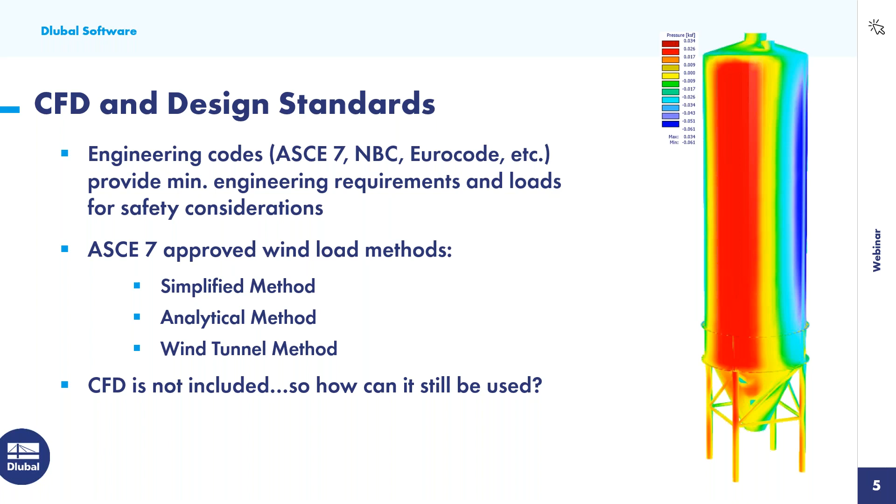On this next slide, I want to lay out a few benefits and advantages we can find when carrying out a CFD analysis. Essentially, a program like RWIND is a very cost-effective engineering tool for many useful applications. I put a lot of emphasis on the word 'tool' here, because we're by no means suggesting that this program should take the place of the requirements within the standard. So how can we use this in addition to the standard? We know that codes such as the ASCE 7 and NBC only provide minimum wind loads.

It could be in certain scenarios that we need to increase these loads due to special cases, primarily for complex structural shapes. We can also use CFD for structures that fall completely outside the standard with no minimum guidelines to follow. The code is very clear on many types of structures, but outside these provisions, we're making a lot of guesses and assumptions. So we can use CFD to ensure those guesses and assumptions are correct.

We can assess the varying wind loads very early on in the design process. We can simply take our structure, put it in this numerical wind tunnel, and adjust that design again very early on based on these applied wind loads.

A program like RWIND can also consider the surrounding terrain and object consideration. So if we have very complex hills or adjacent buildings, which is what we'll take a look at today, these are all going to affect the wind flow. There are certain coefficients within the standard, but these are all generalized, so if we wanted a more in-depth study of that wind analysis, we could do so.

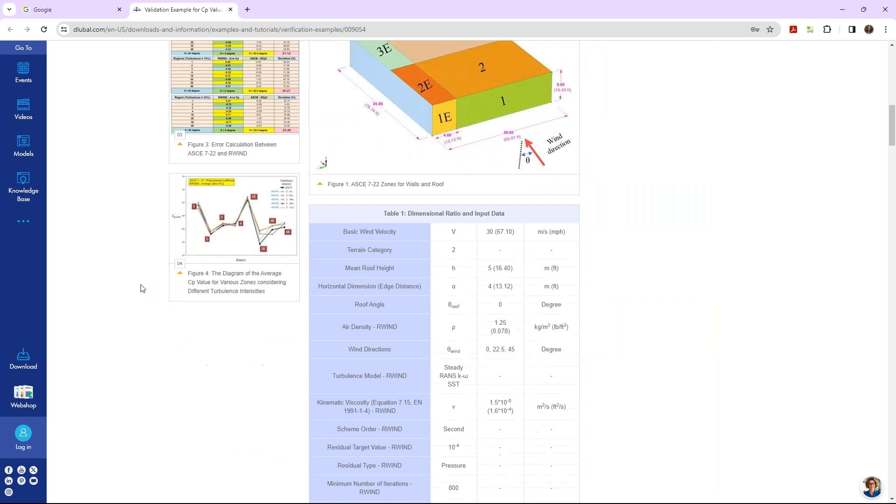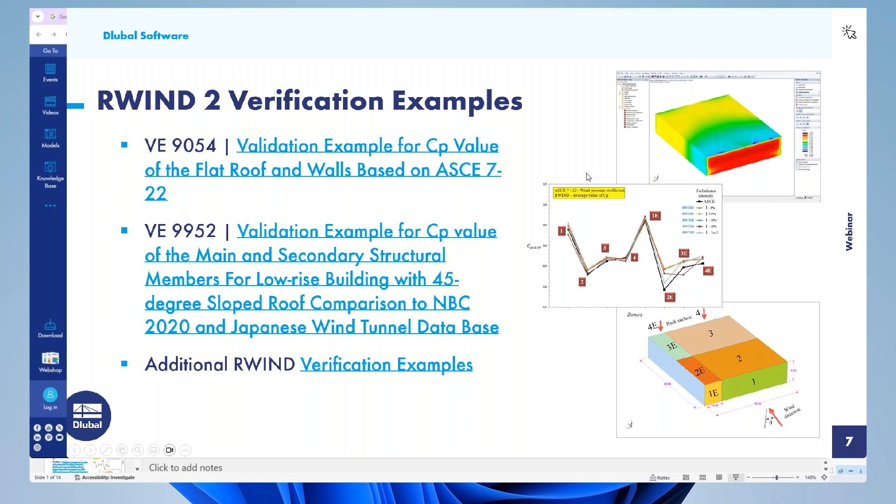The first, if we go ahead and click on it to take a look, is going to compare the ASCE 7 2022 standard with RWIND for a general box type structure. So we thought it might be interesting to compare these two to see how the RWIND results match up to the code standard. You can see the output and the deviation within this table as well as within this graphical format.

In a similar manner, we also have a verification example here with the NBC 2020. Taking a look at this particular verification example on our website, what you will notice is that this is for a dual pitch roof. We're also, of course, going to compare the analytical calculations from the NBC to RWIND, but also this one was carried out in a true wind tunnel test in Japan.

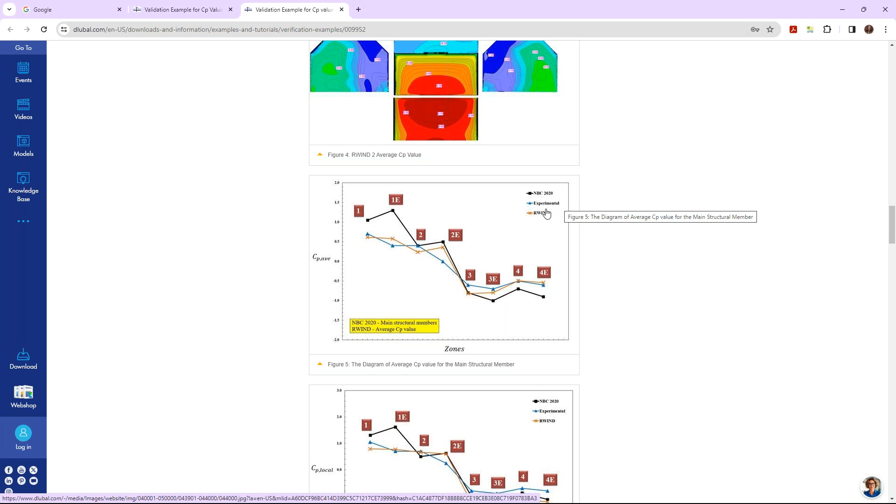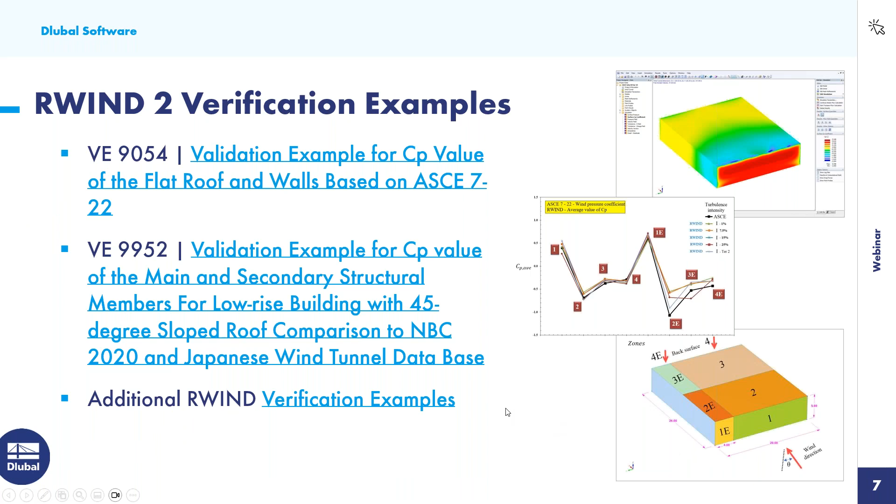So with this verification example, if we scroll down here, we will see those three methods compared in graphical format: the NBC 2020, the experimental wind tunnel, and RWIND. Now we have many more verification examples available on our website, comparing to Eurocode as well as other analytical calculations that you can access with this third link.

Now we'll take a look at several of the new features that we have released within RWIND 2 in the past several versions. I'll preface that each of these features will actually be looking at in our example today. So we'll begin with the wind tunnel size.

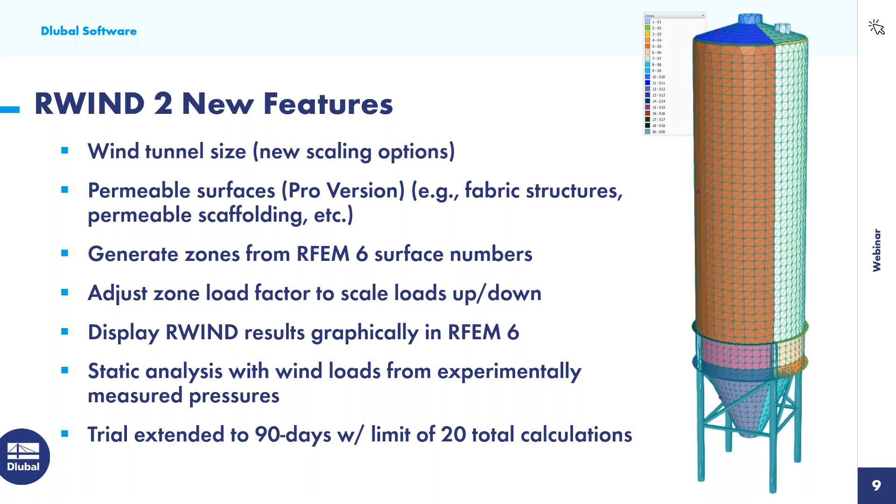And finally, the RWIND trial has now been extended to 90 days. This lines up well with our RFEM trial version that is also 90 days. Both programs will be full capability over this duration. It should be known, though, that with RWIND, we have a limit of 20 calculations. So if you are exceeding that or getting close to that, you might consider buying the full license at that point.

Okay, so let us begin in our FEA program, RFEM here. We can use RWIND as a standalone program, so I do want to make note of that, but for today's presentation we will be integrating the structure into RWIND and then integrating those wind loads back into RFEM.

For those of you who have joined us for webinars before, this structure may look familiar. I did a previous webinar on the silo structure design where I fully modeled this structure, carried out the analysis and design of the members according to AISC, as well as a general stress design for our surfaces. We won't get into that portion today. We're only going to focus on the wind analysis, but you can certainly take a look at that webinar if you are interested.

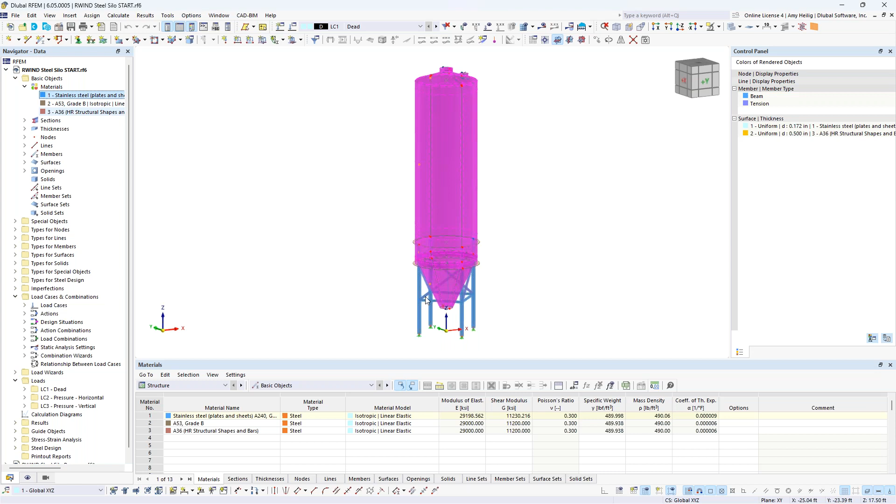So let's take a look at a quick model review. Going to our navigator here, we have our silo structure, and you can see these surfaces are defined with stainless steel. We also have A53 grade B pipe members supporting the structure at the bottom, and then we have a couple of ring beams, A36 material, as well as these channel sections spanning in between the ring beams.

Now, in the previous webinar as well, I had also applied various loads. So we have 3 simple load cases for today. The dead load is only going to include the self weight, so no additional loads applied here. However, if we take a look at the pressure in the horizontal direction, we want to account for some type of fill load inside of this silo structure. You can see that outward pressure along the body of the silo up here close to the top, but not quite to it. And then as well as in the hopper, we also have a friction load here for, again, that fill. So it's going to be in the downward direction along the full height of the hopper as well as the full height of the silo.

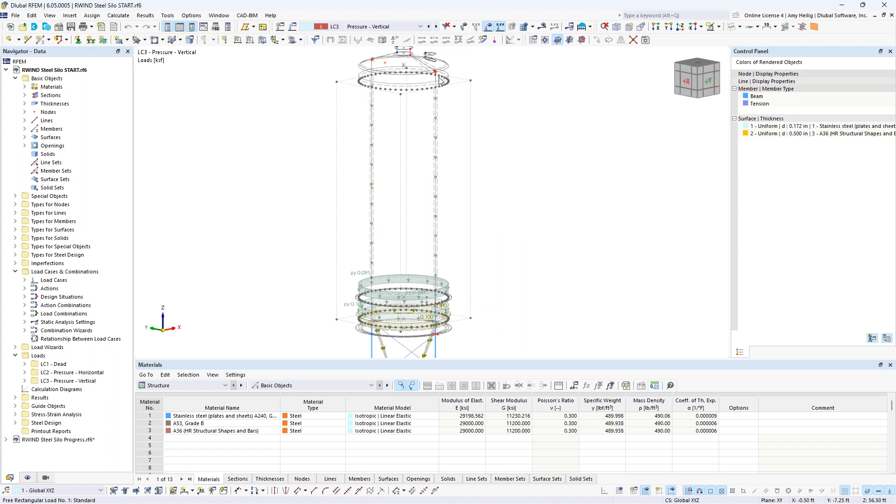So now we want to begin with our wind load. When we go to the base data, which we could right click on the model name to access, or access within our quick tools, this would be the dialog box that pops up when we first create our model.

We can revisit it here under the second tab to take a look at all of the various add-ons available. For those not familiar with RFEM, we work with this add-on concept in the sense that RFEM is the base FEA program that provides the modeling, BIM integration, and the full analysis. But if we want to carry out steel design according to ASCE or concrete design, or advanced analysis like dynamics or stability, we need these add-ons. So you create the package that's specific for your design needs.

You'll notice here that we also have WIND simulation. So this is telling the program that we now want to integrate this model with the standalone program RWIND.

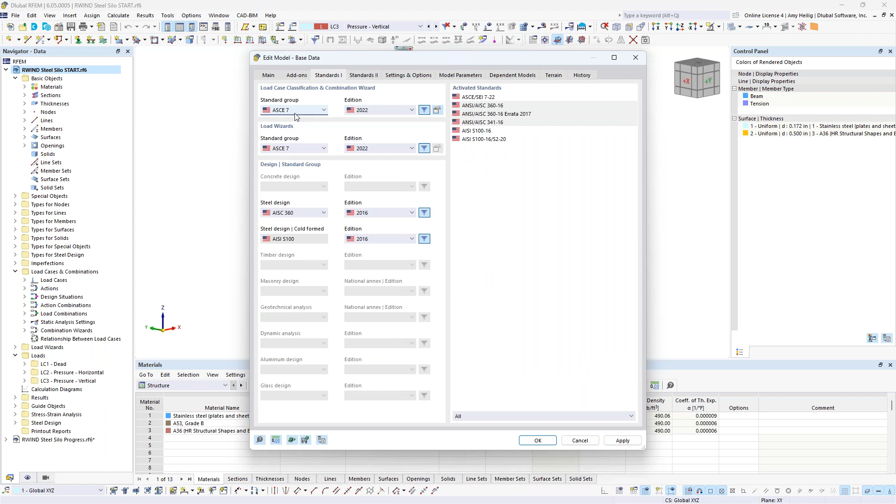Under the third tab, we will generate our load combinations automatically according to the ASCE 7, the 2022 standard, but more importantly, specific to our wind. We will generate our wind load profile according to the ASCE 7 2022 standard, which is available. We also have the NBC 2020 standard available, as well as many other international codes.

Now if we want to carry out the steel design, again we won't be getting into that today, but the AISC 360 is available, or the CSA standard. 2016 is currently released in this version, but we do plan to release the 2022 in the next few weeks.

Once we have this information input, we want to go into our load cases and combinations, and we will generate our first wind load case here, load case number 4. We'll give this the name wind, with the action category set to wind load based on the ASCE 7.

Now I could manually apply my wind loads here to the structure, and in that case I would keep the analysis type set as static, but because we have enabled our wind, we now have the wind simulation option available. This gives us two additional tabs here up at the top.

Moving to the second tab, we want to input the wind simulation analysis settings. This is what is going to be used in RWIND, but we have the ability to set this here within RFEM. We have a default definition set that we can simply modify, or we can create multiple definition types with the option down here in the lower left.

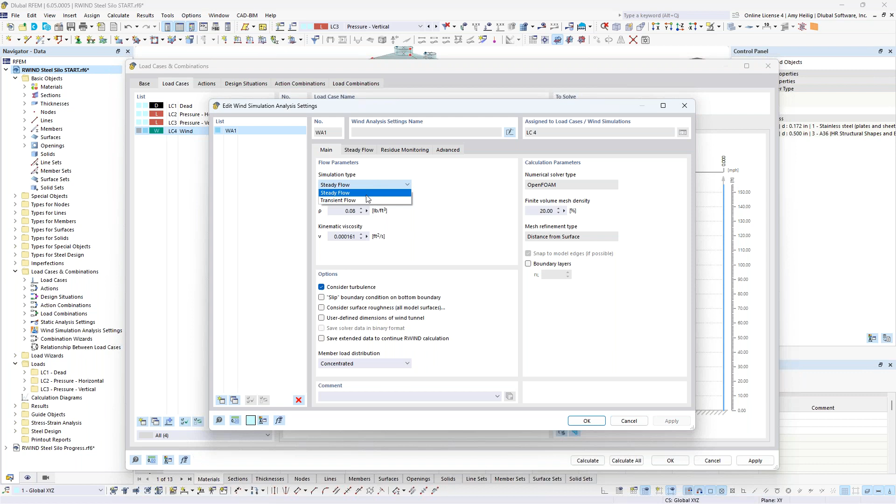The simulation type is going to be set to steady flow. Again, we covered this in the PowerPoint, that if you do have access to the Pro version, you can also run the transient flow. So moving forward with steady flow, we now want to input the density of the air. Variables such as altitude, temperature, pressure, and humidity are all going to affect the dynamic behavior of that fluid moving through the wind tunnel.

We also have the kinematic viscosity we would want to input. This is the resistance of the air to deformation, and it's also the ratio of the viscosity to the density of the air. Several other options that we have available to turn on or off, including the consider turbulence, which by default is turned on.

This will consider that turbulent flow that's characterized by chaotic changes to pressure and flow velocity. Now in turn, if we uncheck this, this would be laminar flow. So most likely we want to consider that turbulence.

Now the second option, the slip boundary condition on the bottom boundary. The lower boundary condition at the tunnel's bottom surface is set to smooth by default, but we could check this to release the surface or to set a different surface roughness. We might do this if we were considering the wind analysis on, let's say, the top 5 stories of a multi-story structure, and we weren't carrying out the full wind analysis for the entire structure. The consider surface roughness option.

If we turn on this option, we get a new tab where we can input the surface roughness properties. This will be applied to all surfaces within the RFEM model. I'll get back to this a little bit later on within RWIND for some additional options.

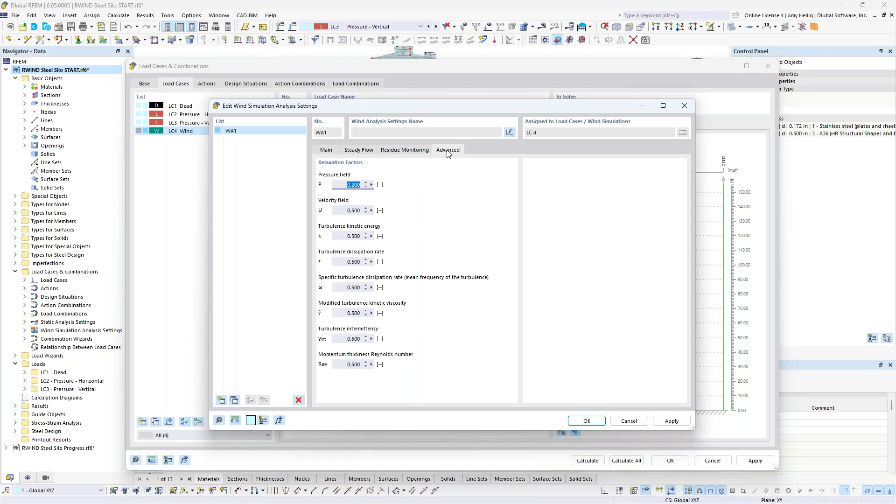Now, the additional tabs, such as the advanced tab, you're probably not going to make too many changes here unless you're an advanced CFD user. So once we have this input, we now move on to the wind profile.

So what is the wind speed entering into this numerical wind tunnel? You can see once again that we do have a default option set here according to the ASCE 7, the 2022 version, because that is what we set in our base data.

Alternatively, we can use this option here for user defined. So no longer are we referencing a specific code, but you can manually input the wind velocity here as a function of the tunnel height, including the turbulence intensity.

We'll go ahead and use the ASCE 7 for our example today, and then we have two additional options here, including the map and parameters. This allows us to access what we call our GeoZone tool, available on the Dlubal website, where we have taken multiple standards all over the world and integrated with Google Maps technology.

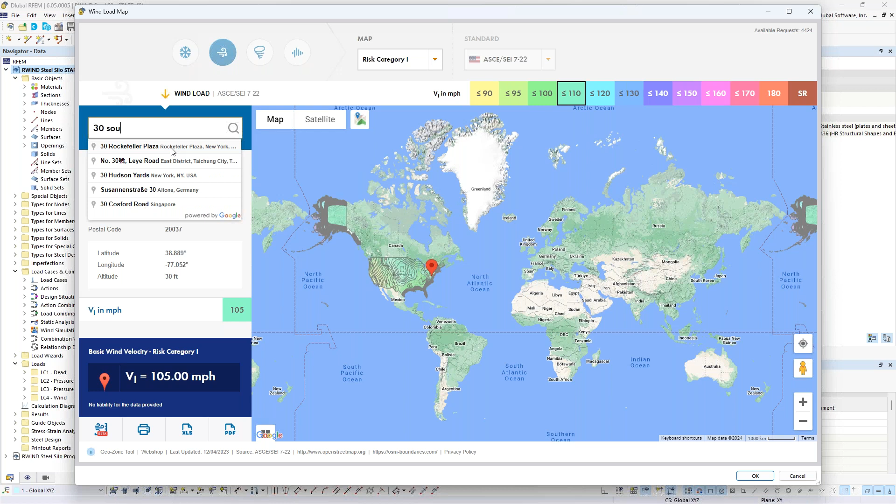Specific to the ASCE 7 here, we would select our risk category. We could toggle here to Google Maps directly, and we could further input the direct address, or we could click on the map. So just choosing here the address of our Philadelphia office, and we can zoom in here.

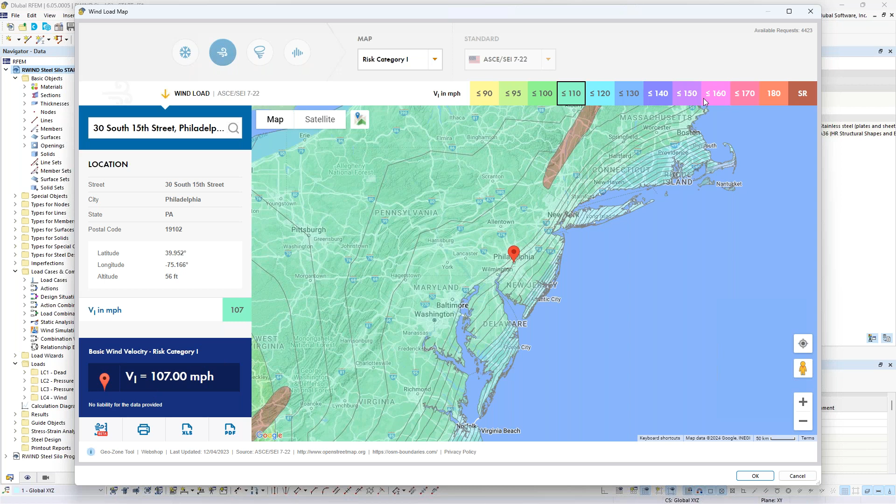We can see that the ASCE 7 has set this basic wind velocity for risk category 1 at 107 miles per hour. We can click OK, and what will happen is all of the location and the wind velocity will directly be imported in for this wind profile.

Now, alternatively, we can choose the user defined, where we just simply type in, let's say, a basic wind velocity speed of 110 miles per hour.

Now we can make modifications to the exposure categories such as C. We also have additional information that we need to input, such as the turbulence intensity, but also these factors specific to the ASCE 7 that are all going to affect the wind velocity here at the start of the wind tunnel. So now we see, as a function of height and miles per hour, what that wind speed will be.

I can toggle here. We can see a better view of exactly the information that we're setting here.

So now that we've input this information, we also can input the wind direction, and this is all based on the global x-axis. So if we have this set to 0 degrees, the wind flow is going to move from left to right here on the structure, in the positive x-axis.

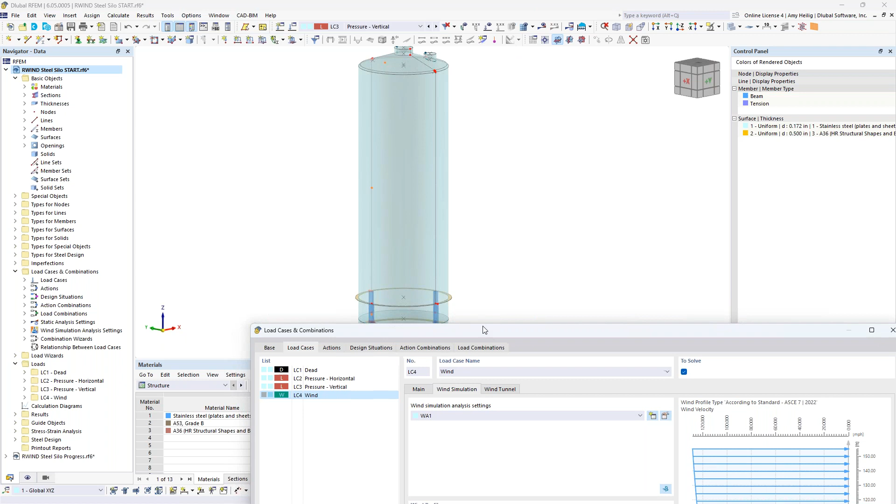Now we'll get to a little bit later on some alternative options here. We'll also discuss the experimental data at the end of our presentation today. So finally, we have our wind tunnel. Again, the program has optimized these. We do have the ability here in RFEM to manually adjust the individual inputs for the wind tunnel size.

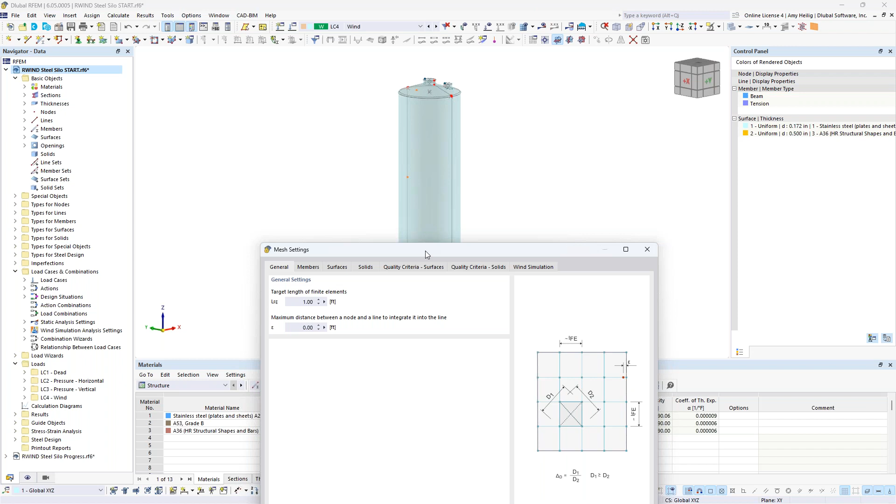Now, before we are able to run this within RWIND, we want to take care of one more additional setting under Calculate Mesh Settings. This is typically where we would input our information for the FE finite element length within RFEM itself, and some additional options here. But we also have a wind simulation tab with additional options specific to what we call...

...our shrink wrap mesh that is always needed with this CFD analysis. I'll show you that once we get into RWIND, but these specific settings here are going to control that shrink wrap mesh, including the level of detail. So a scale of 0 to 4 - the higher we set this, the more detail we will take into consideration. This means, do we want this shrink wrap mesh to account for every single little geometric detail of our structure, or do we want to simplify? This is set by default to 2.

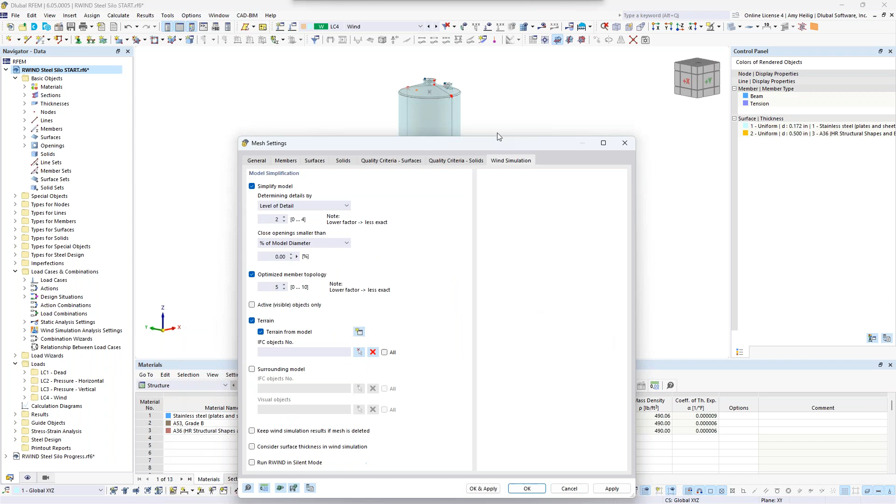We can also close openings, so we can essentially not allow wind to flow through certain areas of our model. Down here at the bottom, we certainly want the wind flow to move through these areas, but I could close them if I prefer. What would probably make more sense is something like open doors or open windows. We can use that shrink wrap mesh to close those openings so that wind flow is not allowed to move through the interior of the structure.

It should be known, though, that if you choose to close these openings, the shrink wrap mesh in RWIND is not going to distribute those loads to the adjacent elements. If you do want to take that into consideration, you should apply another surface element in RFEM. For example, we have a surface load transfer that's purely used as a surface element to transfer loads to adjacent objects without adding any stiffness. There are plenty of resources on that in previous webinars and on our website.

The optimized member topology - for example, if we have a W section, do we want this shrink wrap mesh to account for all of the flanges and webs exactly, or do we want to simplify further with more of a box type structure? Again, the default here is set to something in the middle of that scale.

Down here, the 'keep wind simulation results if mesh is deleted' option is really helpful in the sense that if we make very minor changes to our RFEM model and the mesh in this program deletes, we won't necessarily lose our RWIND results, which could take several minutes depending on the complexity of the structure to run. If you make any major changes, though, you should use this option quite carefully - any geometry changes mean the wind analysis should probably be rerun.

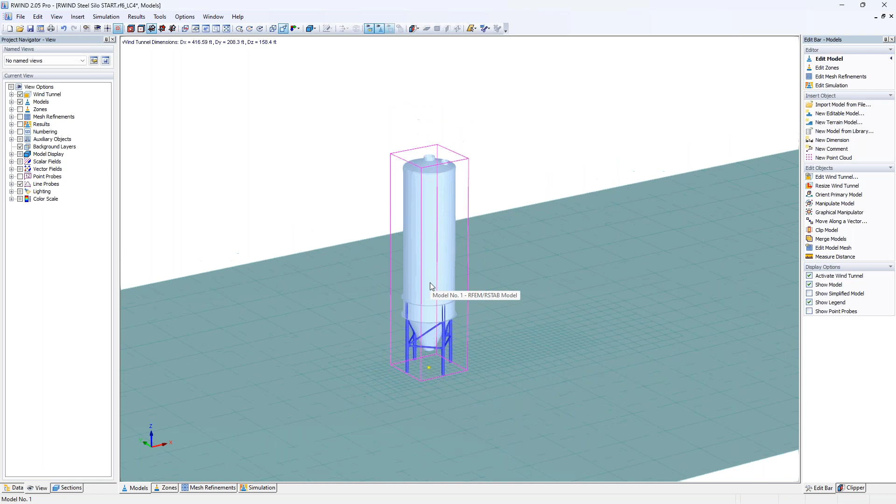Okay, so once this program launches, what we should see is our silo structure brought into this numerical wind tunnel. We'll cover a little bit of the input here first before we run the calculation. Sure enough, here is my silo structure. Again, only the geometry is needed - it's brought into this numerical wind tunnel. We're not really caring much about materials and stiffnesses. You'll also notice in the wind tunnel itself, as I mentioned, that the mesh density is pretty coarse out here, but as we move closer to the structure, it's a bit more refined. This is essentially the mesh occurring throughout the length, the width, and the height of this tunnel.

Now we talked about the new scaling options for this wind tunnel.

In our navigator tab, we can double click this wind tunnel and we have added this scaling factors option. So if we know our model is not converging with the simulation, we need to add some additional length within our wind tunnel behind the structure, which would be L2. We can add a factor directly here, such as 2.0. When I click OK, the program gives a warning saying I must also click the Adjust Automatically button, considering the model standing on the ground. When we click OK, we should now see that wind tunnel extended by a factor of 2. This allows us to quickly make changes to that wind tunnel rather than manually adjusting each input individually.

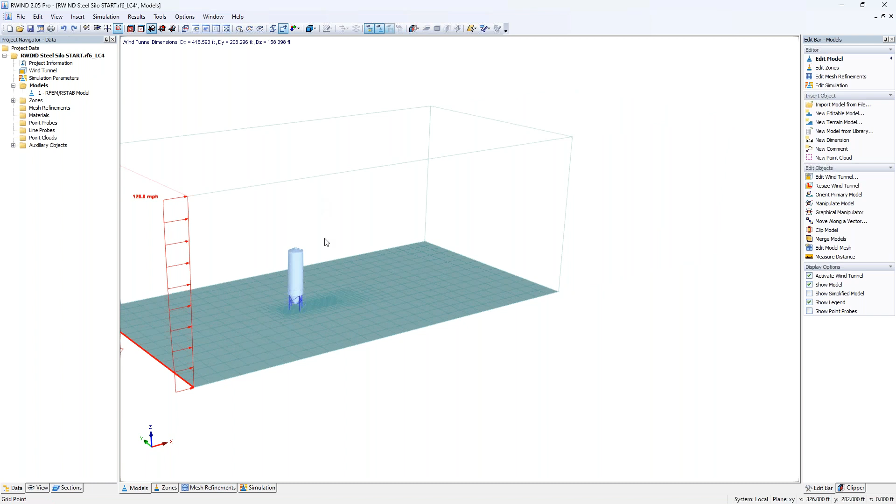We'll go ahead and click the Undo button, since we want to keep that wind tunnel as the default size. You'll also notice that wind profile we have set according to ASCE 7 is shown here along with the magnitude, and that wind flow will move from left to right.

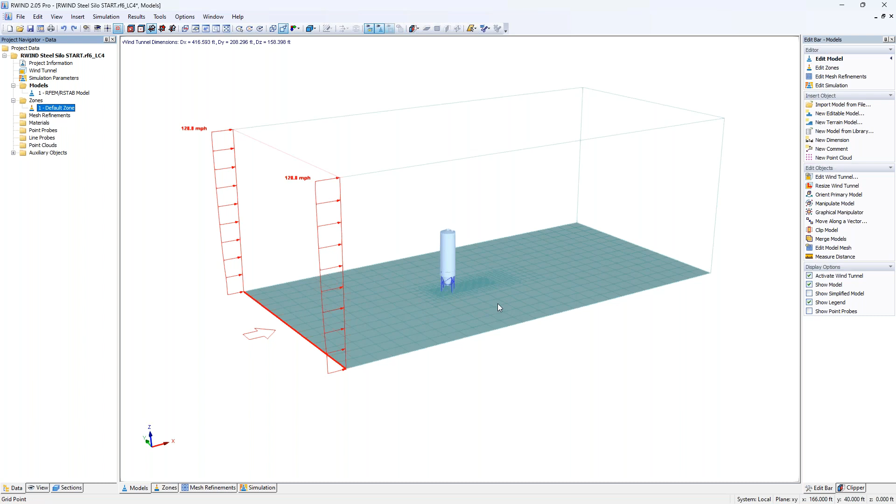We also talked about in the PowerPoint the option for zones. Currently under zones, we just have one option, the default zone, which includes this entire model. Previously, if we go to this second tab and zoom in, we used to have to create these zones manually within RWIND itself.

Now under the option Edit, we have Zones, and we can generate the zones from the RFEM surface numbers automatically. Notice now all of these zones have been created, and I can toggle through them. I'll also turn off the mesh edges so you can see this more clearly. Every single zone is going to correspond with the surface number that we set within RFEM itself.

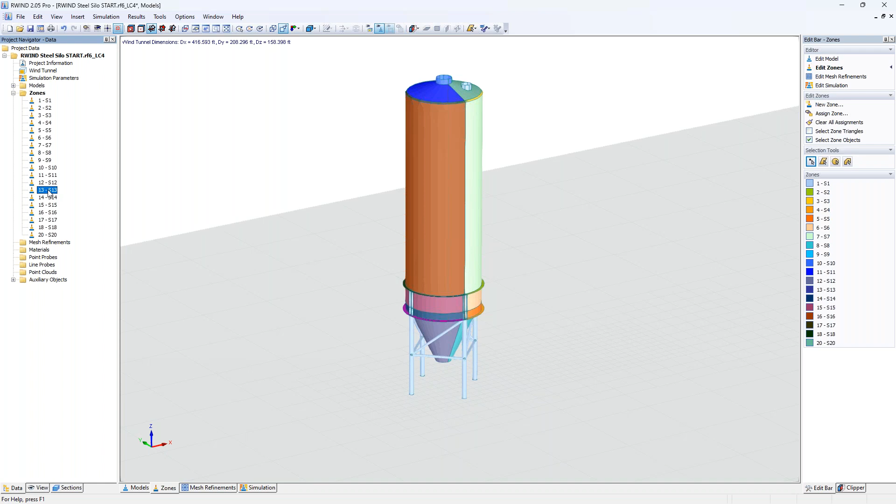Ultimately this is used to subdivide the model into parts, but also to assign specific input properties. For example, graphically, I can choose one of these zones, double click on it, and assign a new material. When I create a new material definition type, I can apply those surface roughness input options. We previously saw this option in RFEM as well, but it was applied to all surfaces. Now within RWIND, we can apply different surface roughnesses to each individual zone or surface.

Additionally, if you have the Pro version, you can consider the surface permeability. So we have the Darcy coefficient, inertial coefficient, and the porous media length to allow some of that wind flow to pass through the surface.

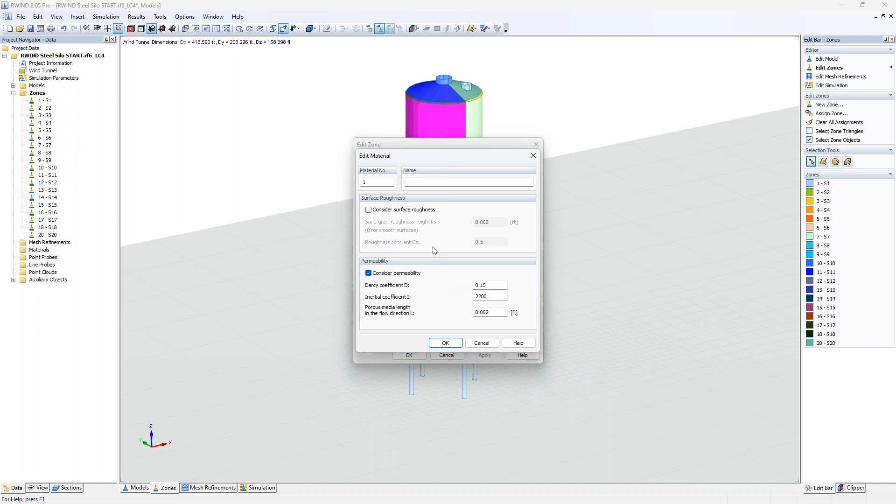After we are done, we will also use these zones for result interpretation like drag forces. Going back to the model, I'd also like to take a look at this shrink wrap mesh. We'll go ahead and activate it under the simplified model. I'll turn off my wind tunnel, and zooming in, you can see that the program has created this shrink wrap mesh automatically for us.

This is truly the huge advantage of RWIND: when carrying out a CFD analysis, it's required that you have this shrink wrap mesh, and it can be really time consuming to create this simplified model from our more complex RFEM model. But the program is doing all of this automatically for us, as needed in that CFD calculation with the OpenFOAM solver.

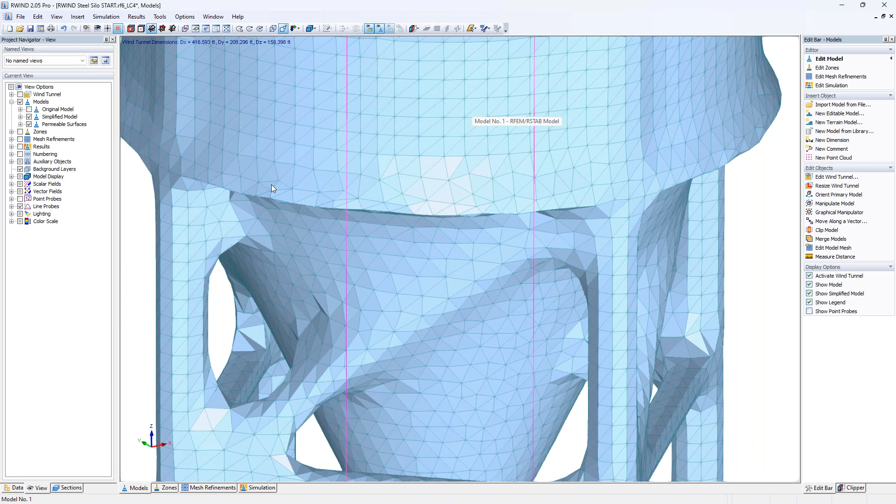It's also correcting any mesh errors automatically. If we zoom in, we have triangles everywhere that have to intersect perfectly with the adjacent triangle, so the program has taken care of all of that for us. It has closed a lot of these open edges, and also deleted or simplified any unnecessary detail.

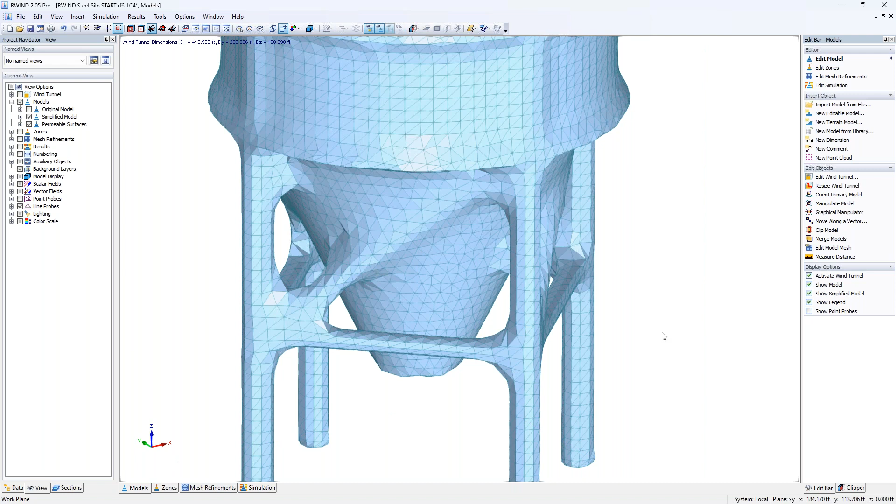Again, this all depends on those settings we set back in RFEM, or we can control them here in RWIND. You can see that there's certainly some simplifications going on here, but that's going to speed up our calculation time a bit rather than waiting longer to account for more of those details.

So we are now ready to run the calculation, but rather than waiting for this to run, I'm going to go ahead and open up an already saved model. When we run the RWIND calculation, we would jump to the simulation tab, and the run calculation option would be available. Once it's done, we're now presented with our results here within RWIND.

We are initially presented with the surface pressures. Viewing the surface pressures, we can move our mouse around and see the magnitude directly given, with the pressure acting perpendicular to the surfaces. When we rotate this around, we may see higher suction forces denoted by negative values.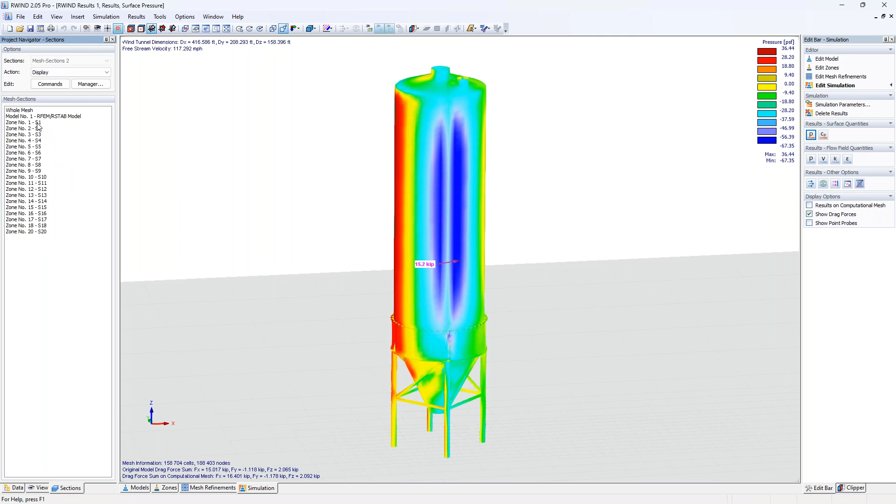We can also activate the drag forces. The drag force total for the RFEM model is shown at 15.2 kips, and we can see this shown graphically here. Under these sections, we can take advantage of those zones, so zone number 1, my members only, updates the drag force to show only the forces for those relevant sections.

We could continue with various zones, but perhaps I'm interested in both zone 7 and, holding down the control key, zone 16 for the body of the silo structure, and I see my total drag force here as 10.6 kips.

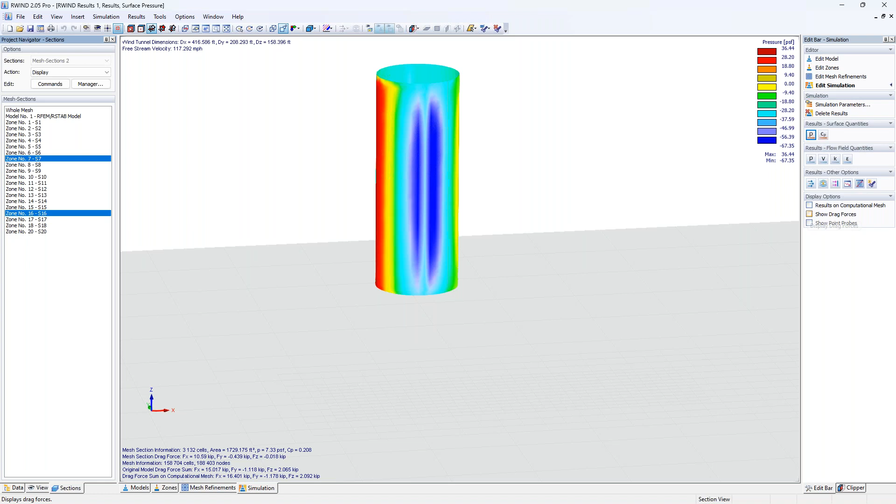We'll turn off those drag forces and go back to the full member model for the pressure. We can also take a look at the pressure coefficient factors, which represent the relationship between the static pressure and the stagnation pressure. These contours shouldn't change from our pressure view, but the magnitudes certainly will.

We can then view the pressure in and around the structure. You'll notice we have a slicer directly through the wind tunnel. Under this clipper tab, we can change the direction in the X or any other plane available, and slide it from left to right to see the wind pressures changing, using our mouse to view those magnitudes around the structure.

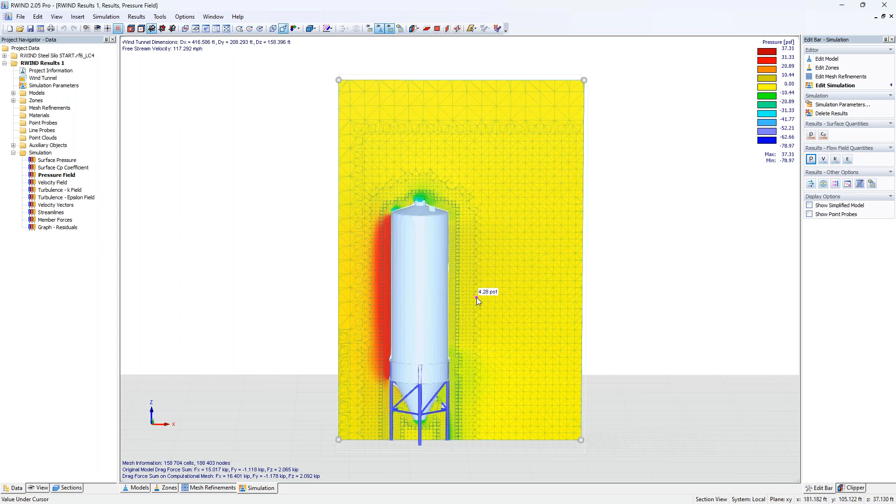Same concept here for the velocity field. We can actually view the wind flow velocity in miles per hour in and around the structure.

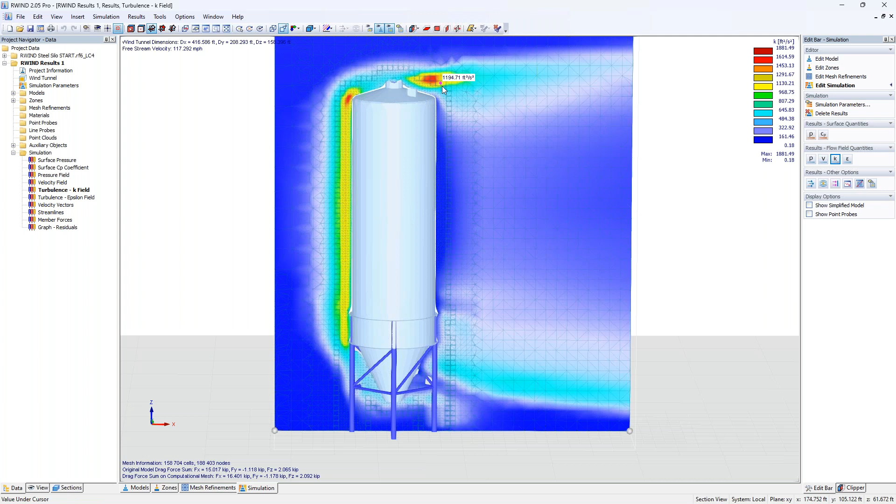Then we have two additional options related to turbulence. The first shows the turbulence with respect to kinetic energy, and again we can show the magnitudes here. Our epsilon shows the results of the turbulent energy dissipation.

Moving on to the additional options under other options, we have our velocity vectors. This allows me to zoom in and see the magnitude and direction of these velocity vectors and how they'll essentially affect the structure, showing how the velocity either moves toward the structure or creates that particular suction force.

Finally, we have our streamlines. This shows the particles that allow me to study the airflow as it moves through this tunnel, and we can adjust the streamline settings here.

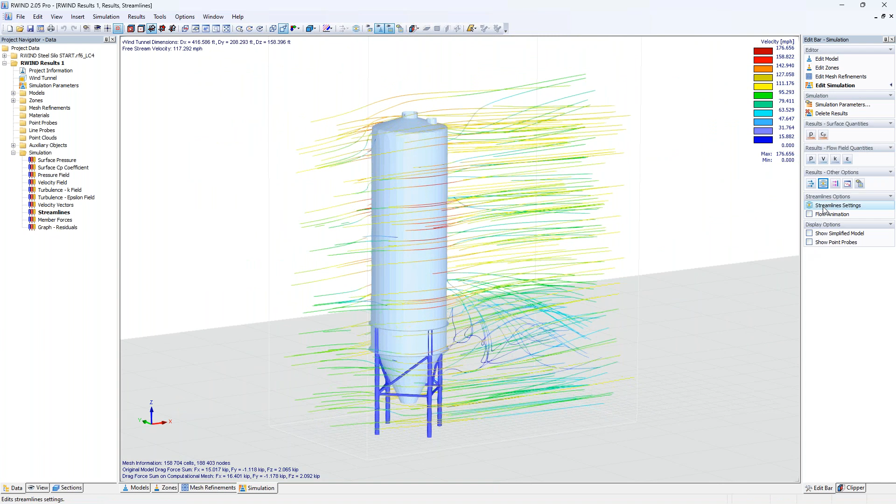Under the drop down at the top, we can change this to a segment, a rectangle, or currently it's set to a 3D box. We can rotate this around and graphically modify the size of our 3D box. If we wanted to set that to something more narrow, we could rotate it.

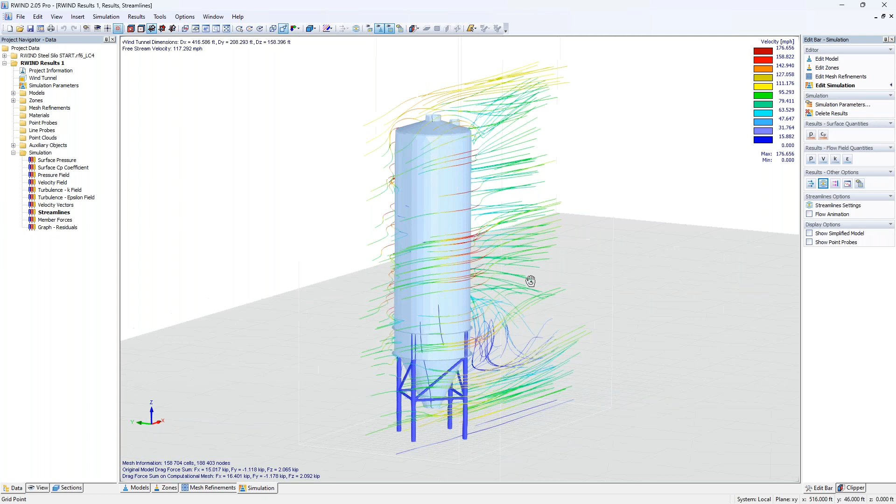Once we click OK, this will adjust those particles and we can activate the flow animation, which is certainly helpful in studying those airflow particles as they move around our structure.

Under tools, we can create a video file, saving this MP4 file to your computer. This could be really beneficial in something like a digital calculation package that you're submitting to your client.

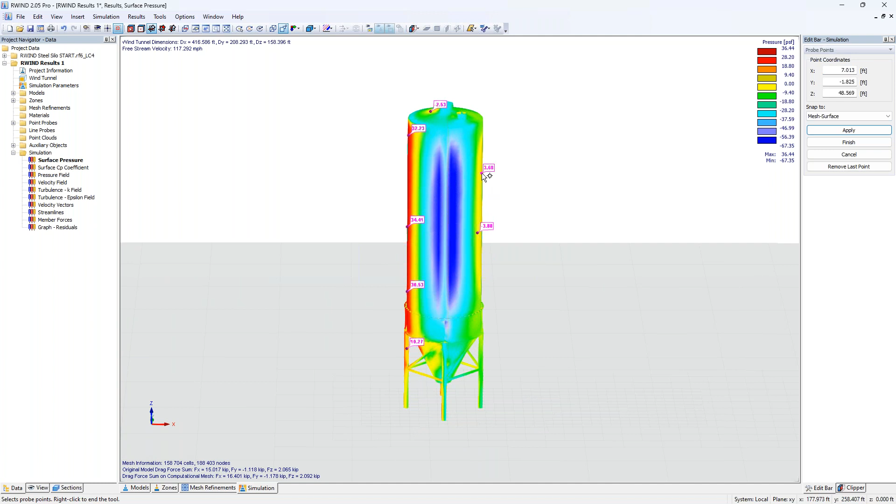Moving back to the pressure, we also have the option called point probes. When I right click to add a new point probe, I can set these graphically and click on various areas of my model, including the members or the backside, to see these suction values.

You'll notice that when I set these point probes, they are now stationary. This allows me to view the pressures at particular points, or I can toggle to the pressure coefficients. The magnitudes will change, but these point probes are always available within the model, and we can turn them on or off with this checkbox on the right.

In a similar manner, we also have what we call line probes, so I can right click here to create a new line probe.

If I try and set this graphically, the program gives a short warning saying it can't set it graphically, and to please use this alternative tool. This tool actually resides here, where we can graph along the line probe.

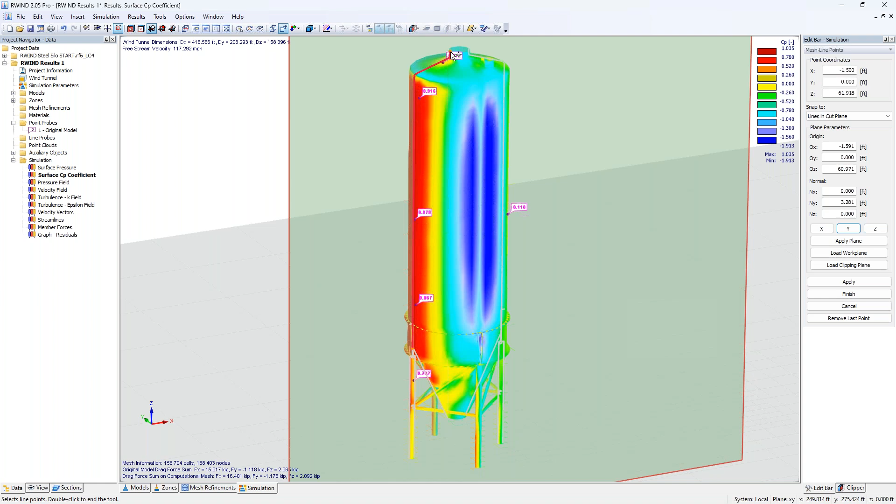Notice we're making a slice through the structure. We can change our slicing plane and set an offset if we'd like. Essentially, we can click on several locations with our mouse, creating this cut right up through the center of the structure in the vertical direction. When I'm done, I can double click, and I want to toggle back to our pressure as a function of the length for that line probe.

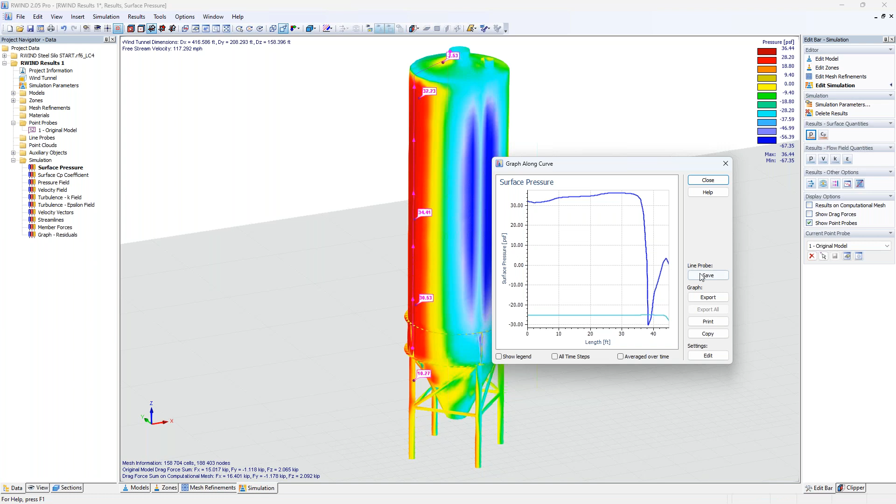Now we see an alternative line here. This is going to be our internal pressure, maybe something we're not so concerned with, but we can certainly view this pressure along this entire height. When we save this, it's now saved as a line probe that we can always access for any future results within the line probes tree option.

I also wanted to point out, under the View tab, that if we take a look at our results we can activate the member forces. We're looking at wind pressures on the surfaces themselves, but remember we have all of these members supporting the silo structure at the bottom. These member forces are given here in KIPS. This is the information that will be taken back into RFEM and applied as concentrated loads for that static analysis.

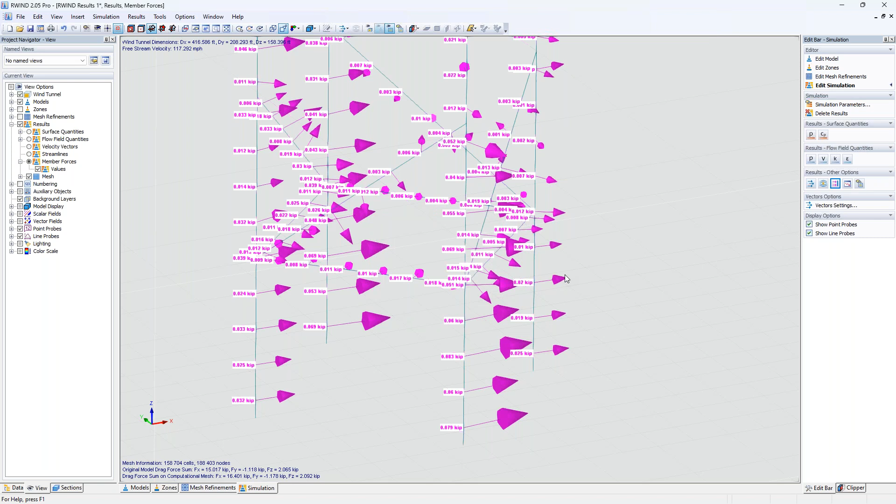Now that we're done reviewing the results within our RWIND, we would exit out of the program and go back into RFEM. We'd want to save our results, which will bring those wind pressures into the model. I do need to open up an already saved model here for my load case number 4, and I want to run the static analysis for this load case.

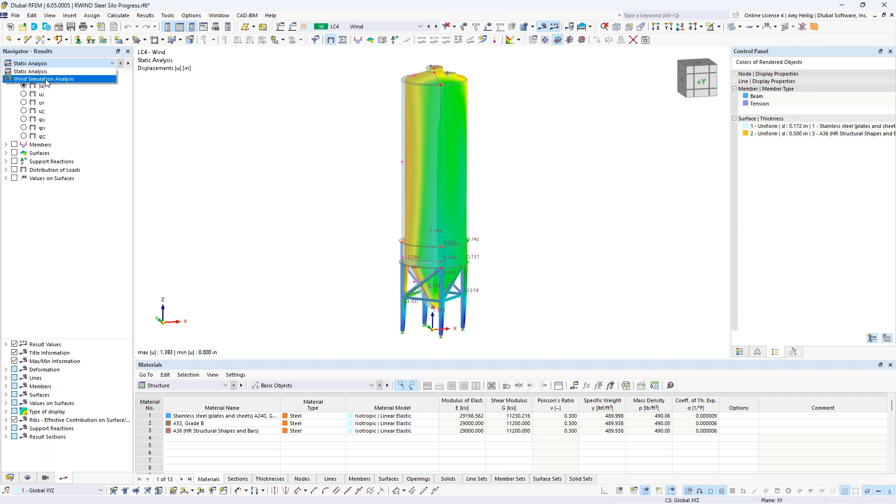Now, I've already done so, I can just simply view the results, but that solves very quickly because we already have our wind pressures brought back into the program. One feature we've recently added, once you run this calculation, is this toggle now available in our navigator, in this fourth tab under results, called wind simulation analysis.

This allows me to view the wind pressures directly in RFEM itself, as well as pressure coefficients. Technically, I don't even need to open up RWIND at all. If I prefer, I can run this calculation silently in the background and then view these same pressures directly in RFEM.

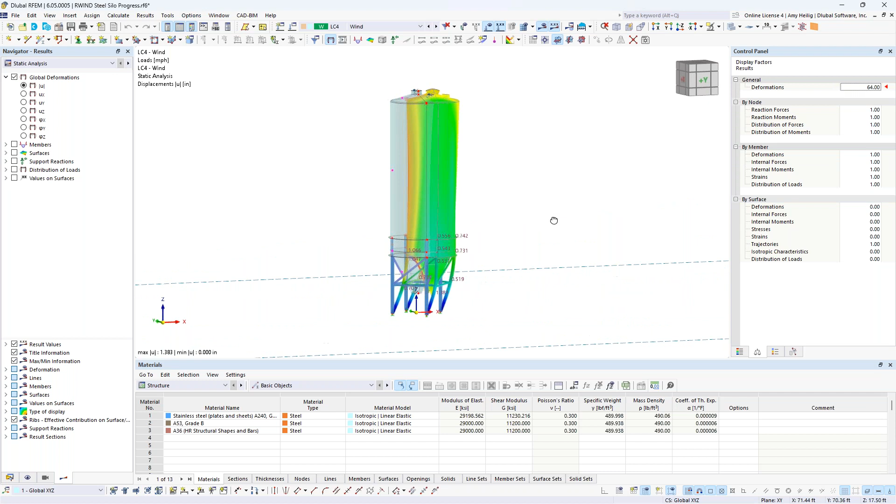We've also carried out the static analysis, so initially what we're seeing here is based on the wind tunnel, which we can view as the graphical load shown within the RFEM model, and the deformation of this silo structure. If I increase the deformation factor, just as we'd expect, we're seeing this structure deform from left to right based on this applied wind load.

What else we can take a look at are the member internal forces. We can activate the members and view axial forces, bending moments, shear forces. Taking a look at the axial forces in particular, as we'd also expect, we have a high tension force for this column at the front of the wind load, and our three additional columns here are in compression.

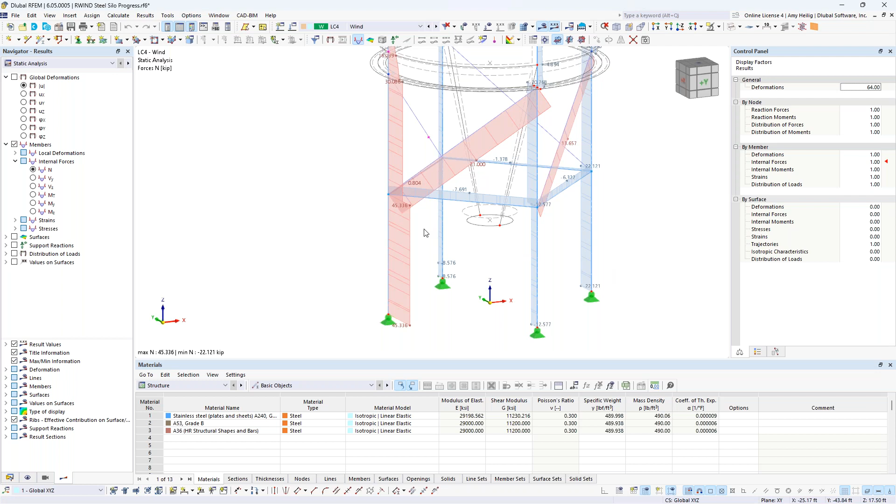We can view the results of these surfaces by activating our option here, so we can view the internal forces or view the stresses such as the von Mises stresses. If we zoom out, we can see relatively low stresses for this wind load. Maybe the highest stresses are down here at the base of our hopper.

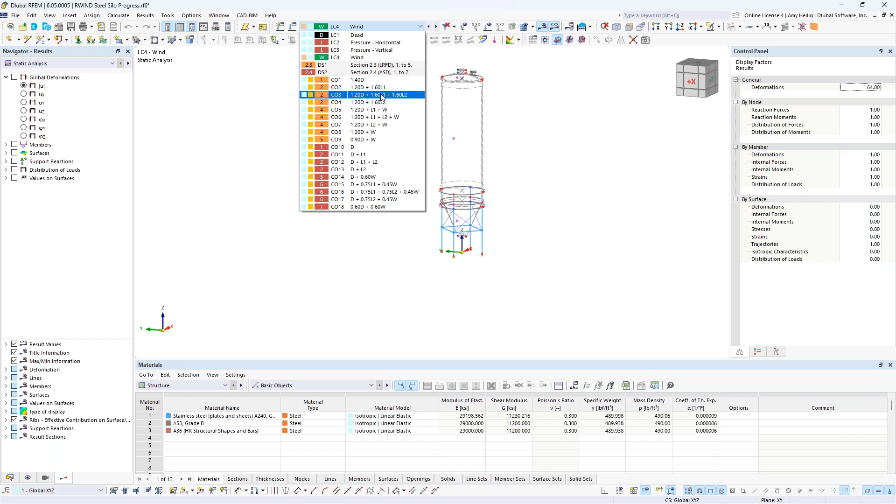Now that we have these results shown for this wind analysis, we would want to further combine these into our load combination. Remember, we have these additional pressures for our fill, and we also have self-weight. The program has automatically generated these load combinations according to the ASCE 7. We can take a look here, graphically showing the wind load, for example, with that fill pressure along with the self-weight, and we could run the full analysis for these load combinations.

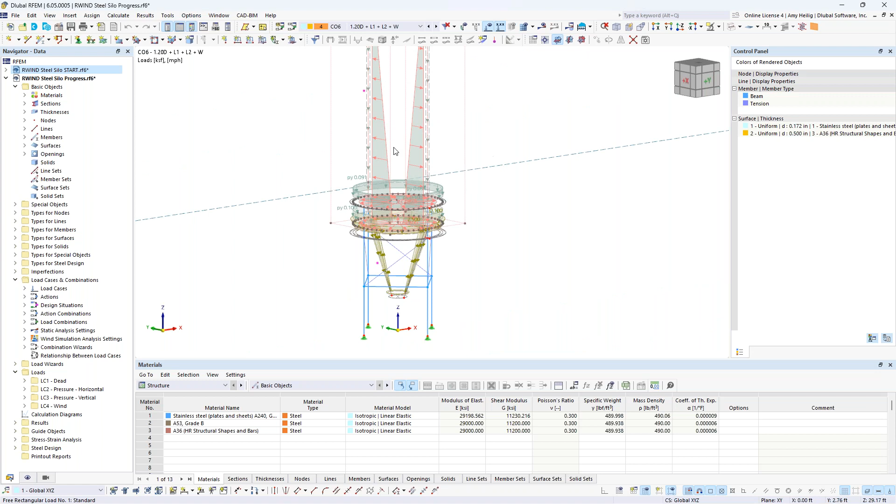This is also the point in time that we would probably want to carry out the design of our steel members, or the general stress design of these surfaces.

You can do so within our additional add-ons, such as the stress strain analysis and the steel design add-on. Again, this is where you can refer to that other recorded webinar where I went much more into detail from this point forward with the structural design.

Going back to our original load case here for wind load, we have applied this wind load based on the global X-axis. But we know in reality that wind does not necessarily act from one direction. It can act from any direction.

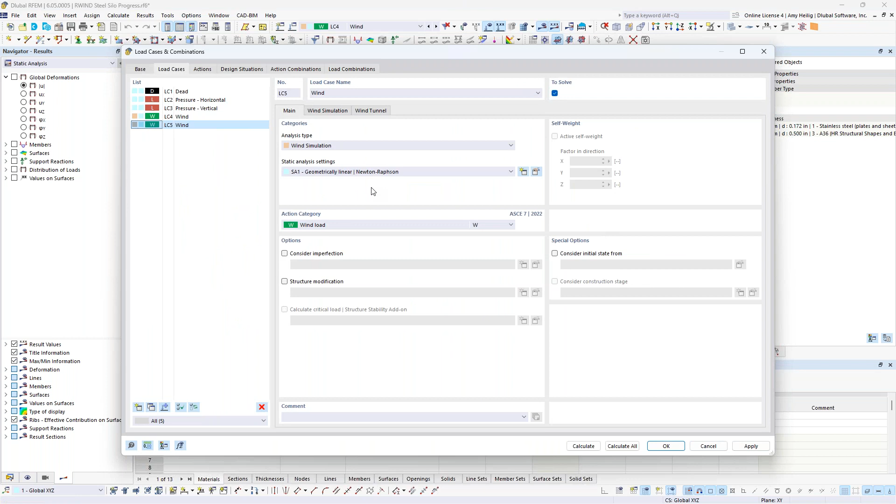So we would want to consider additional load cases. We can do so by going back into our load cases and combinations, and we can directly make a copy of load case number 4. Notice that all of the simulation analysis types, the wind profile, everything was copied from this previous load case. But what we do want to adjust here is the wind direction.

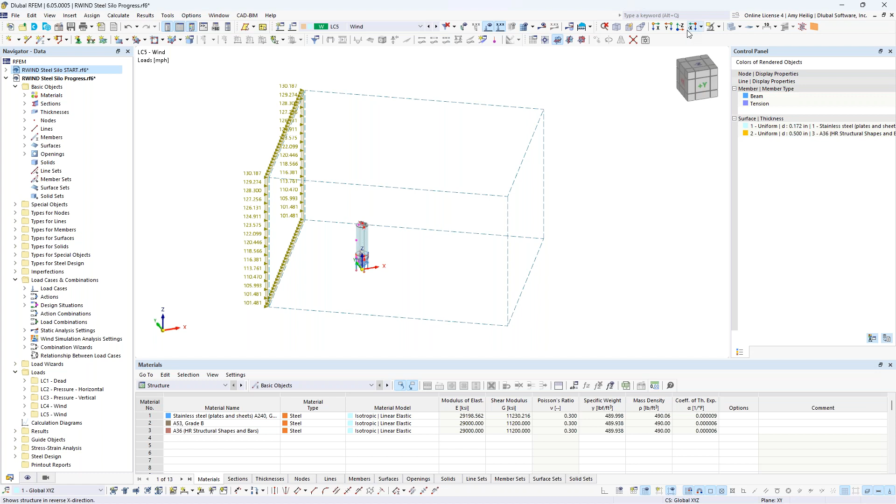Perhaps I want this to act at an angle of 30 degrees. I can input 30 degrees. The program will ask us to delete the results - that's fine. Maybe we go into a plan view here, and now we see that this wind flow based on the global X-axis is at an angle of 30 degrees.

This is certainly important, especially for unsymmetric structures. We want to take a look at the wind acting in all different directions, and you really have the freedom to set any angle that you prefer. So we'd want to continue to do so with those load cases.

However, I want to show you a user-friendly option for this load case generation. It's available in our navigator under the Data tab, under Load Wizards, and we have wind simulations here. This will actually generate those load cases automatically based on a specific step angle.

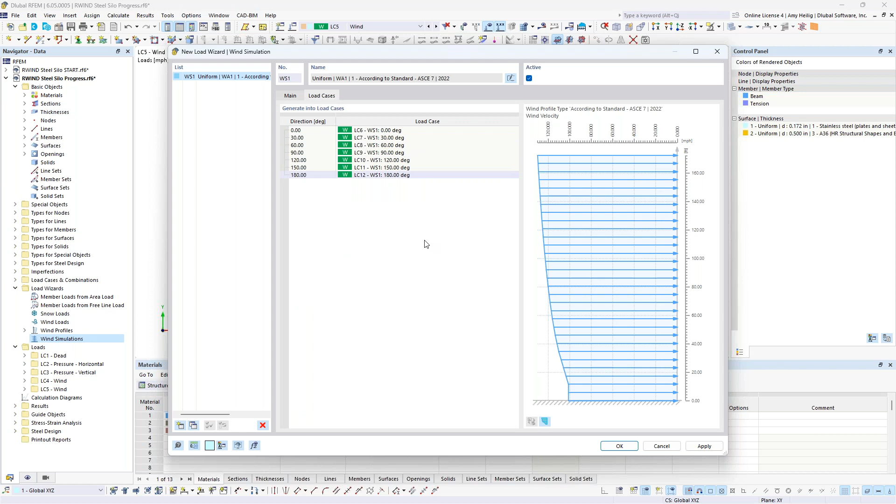I'm going to set this to 30 degrees, and I would like the program to create these load cases from 0 degrees to 180 degrees. Now under the Load Cases tab, notice that all of those specific load cases, every 30-degree increment, are automatically generated. So what we should see now within our drop-down box is not only the 2 load cases that we manually created, but now we have these additional load cases that the program has quickly generated for us.

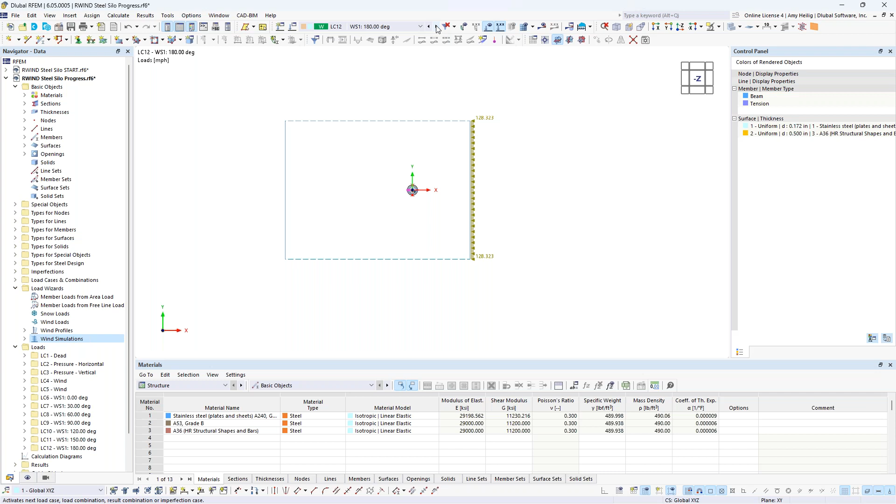Taking a look at these in plan view, we have 0 degrees, but as I cycle through these various wind load applications, notice that my wind tunnel dimensions are automatically updated for me. This is the information we would want to carry out the analysis within RWIND. We could bring it back into RFEM and notice that the load combinations were automatically updated as well to consider those different wind directions.

Going back to our original load case here, another topic we would like to discuss is adjacent objects. The code does have some coefficients or recommendations for when we have adjacent objects, but for anything more complex, we would perhaps want to take this into consideration in our wind analysis directly.

For my example today, I have this silo structure, and this is the structure I'm interested in designing. But perhaps there are identical silo structures placed very closely to this one that I know are going to affect my wind flow.

What we can do here is take this model and go to File, Export. I can export this model as an IFC file. I would go ahead and carry that out, and I can save this IFC file directly to my computer.

Then I can immediately, in this same RFEM model, go to File, Import, and import that IFC model I just created. Now I went ahead and did so already for this example, so we can select this IFC file that we created from exporting this silo structure.

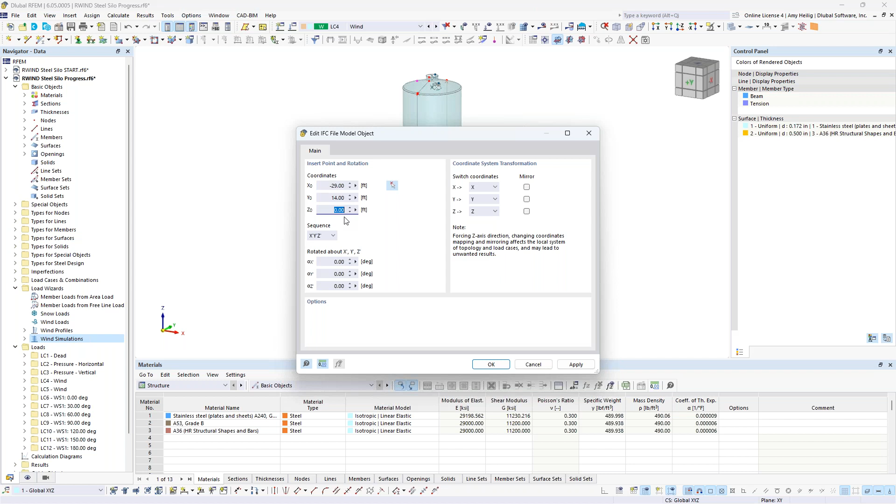I can either graphically select a point here to import the IFC, or I can input the coordinates directly. So we'll begin with the coordinates of -29 in the X, 14 in the Y, and 0 in the Z, which is our elevation. When I click OK, what we should see here is this IFC structure generated.

Now, IFC objects are not anything that we're designing here within RFEM. We could right click here to convert them into surface models with stiffnesses, materials, and thicknesses, but I'm really just using these objects for the wind analysis only.

And we get a 4th tab here in our navigator where we could quickly turn on and off these IFC objects, but ultimately it's really not going to influence the static analysis and design, only once we get into RWIND.

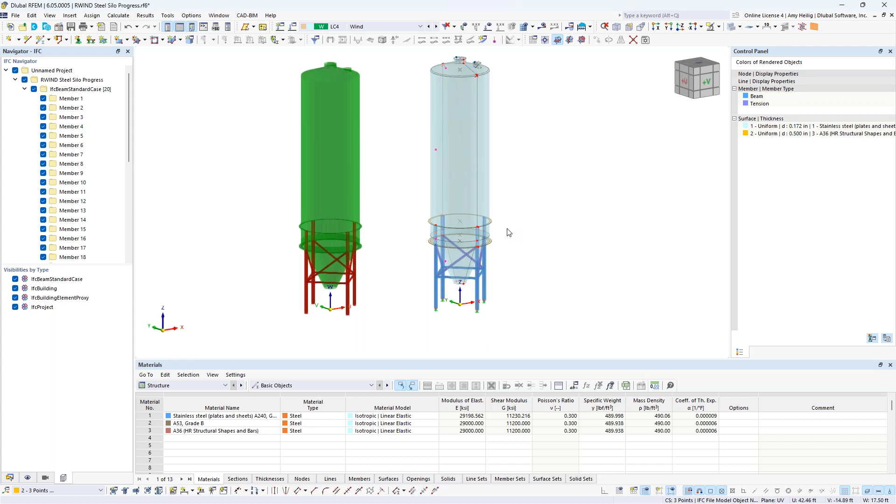Now I'm going to do the exact same thing here by file importing in that same IFC file. So we go ahead and select it from our saved location on our computer. And the second coordinate point that I'm going to put in here is again -29, but this time I'm going to modify this to -14 and 0. And I click OK, and what we should see is our additional silo structure.

So now we have these closely placed structures adjacent to each other. And when we turn back on our wind flow, again, based on the global x-axis, there's no doubt that the wind flow will certainly be affected in this scenario.

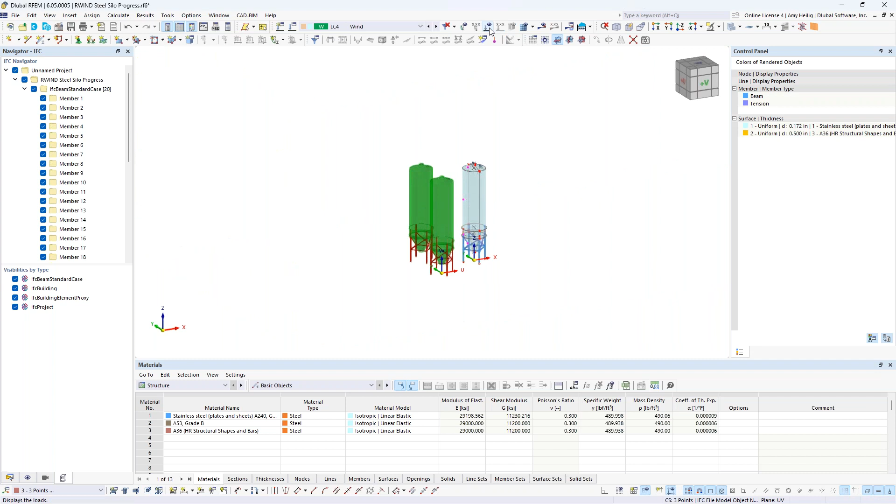So before you export out to RWIND, under the calculate mesh settings, it is important here that if you do have these IFC objects you want to take into consideration in RWIND, under this wind simulation tab, we do need to activate here the export of all IFC objects, or you could graphically select which ones you would like to export. So that is something that you should take into consideration.

So now that we have taken these IFC objects and inserted them into the RFEM model, before I go into RWIND, I also want to discuss our last major point here, which is the topic of experimental data.

So for now, I'm just going to totally hide these IFC objects. They still exist, I just graphically turn them off.

And we will assume that for this particular silo structure, we have taken it and run it in a true wind tunnel test, or it could be analytical calculations according to ASCE 7, whatever it may be. And we're wanting to compare these results to what RWIND is coming up with. So we can do so within this load case number 4, our original load case.

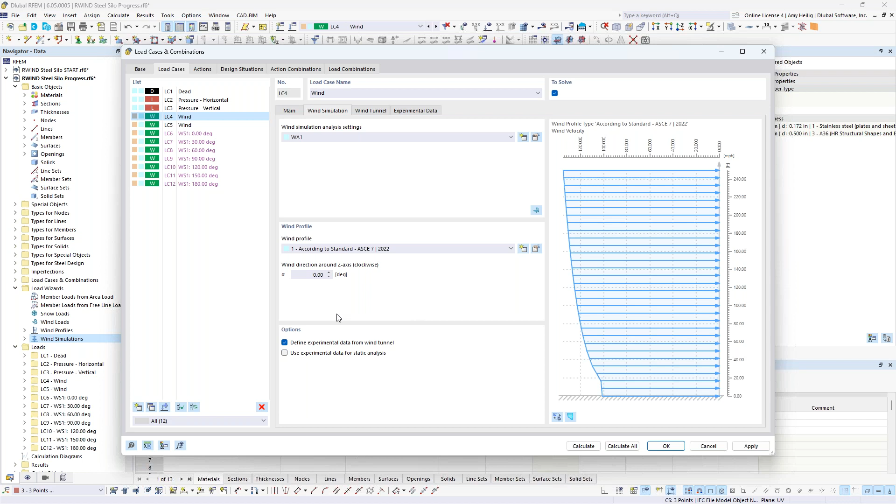Under the wind simulation tab is the option here to define experimental data from the wind tunnel. So when we activate this option, we now get a 4th tab here, and this requires some points to be input where I can compare them ultimately to my experimental data.

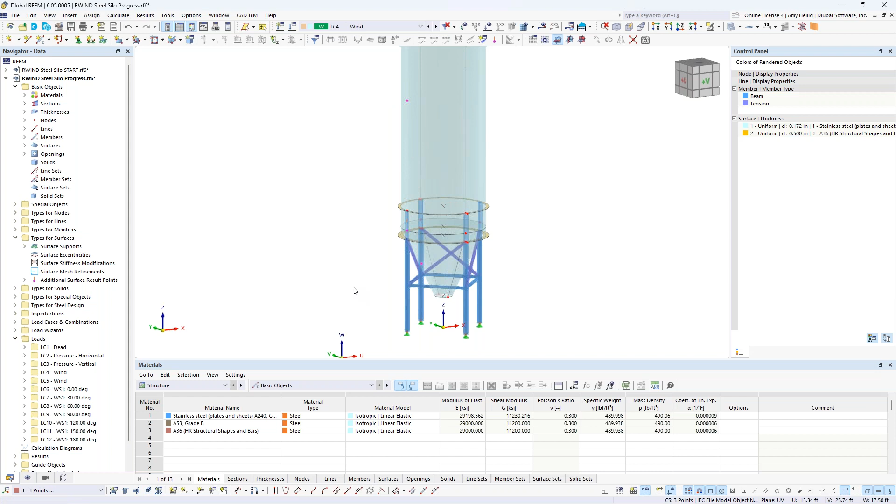Now, in order to populate these wind points, what I would suggest doing is under the option types for surfaces, we have this feature here called additional surface result points. And originally with the model, I created some nodes here. For my example today, they're pretty random just for example purposes, but you'll notice that we have a node here along the hopper, kind of at the midpoint.

I also put a node here spanning in between my ring beams. I have an additional node here and also one at the top. So this represents the points that I would like to tell the program to compare to RWIND from, in comparison to my experimental data.

Now, in reality, if we have a wind tunnel test or analytical calculations, we would have many, many more points than just these 4 points. But for example purposes today, we'll just use these 4.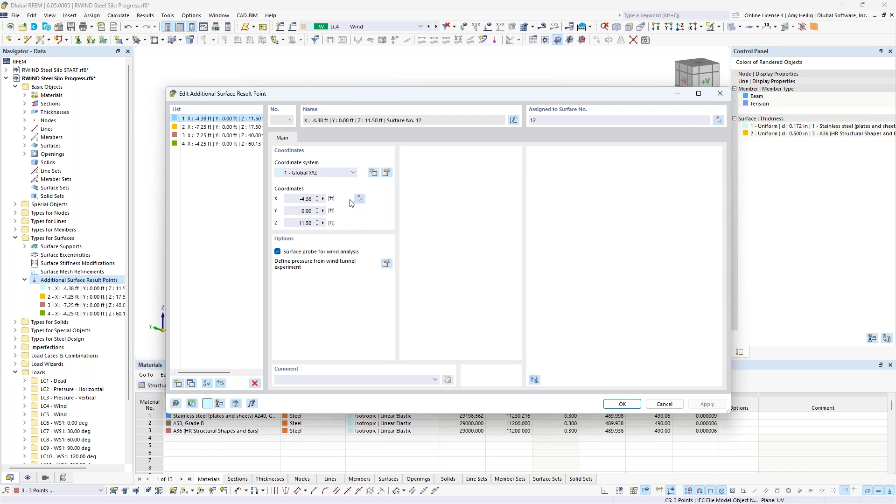So under the types for surfaces, additional surface result points, we would right click here to either edit this option or to create a new result point. Now, I've already taken the liberty to do this, but you can easily create a new point in the lower left-hand corner, and then you can graphically select an existing node here on the structure, or you could input the coordinate points yourself. So I have created these 4 points, again, just graphically selecting the 4 points that I showed you here on the structure.

I've also activated this option here, surface probe for wind analysis. So this is important as well.

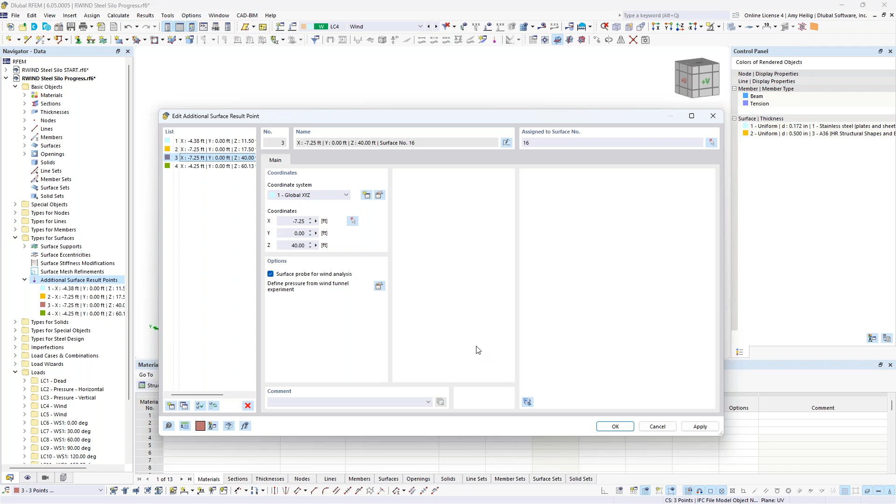So now once we have input in this information, what you'll notice here under load case number 4 in my experimental data, is that these 4 points are automatically populated. They're exactly what I set back here in the surface result points. But now I want to tell the program, what is my experimental data?

What is the pressure that I found outside of something like RWIND, such as a true wind tunnel test or analytical calculations? So we can begin by setting this first point at the bottom hopper to 10 pounds per square foot. And then the 2 points located along the silo body, we'll set this as 40 pounds per square foot, so 0.04 kips per square foot. And finally, at the roof, this point up here at the top, we will set a small suction force of 0.005.

Again, completely arbitrary, just for example purposes today. We also need to limit these pressures to specific surfaces. We don't necessarily have to choose just one surface, we can choose multiple, but in reality, when we have multiple points, these are probably going to be acting on single surfaces. I've already defined this information here with the surface result points, this was a requirement. So it's very easy to select these, hit Control C, select my column cells here, hit Control V to copy and paste.

Now what else you'll notice is the interpolation methods available here. The first is diffusion, which is the default. This is essentially going to distribute data from the source point over the surface, and this will interpolate only on one side of a surface. So it's really good for open type structures like canopies, for example.

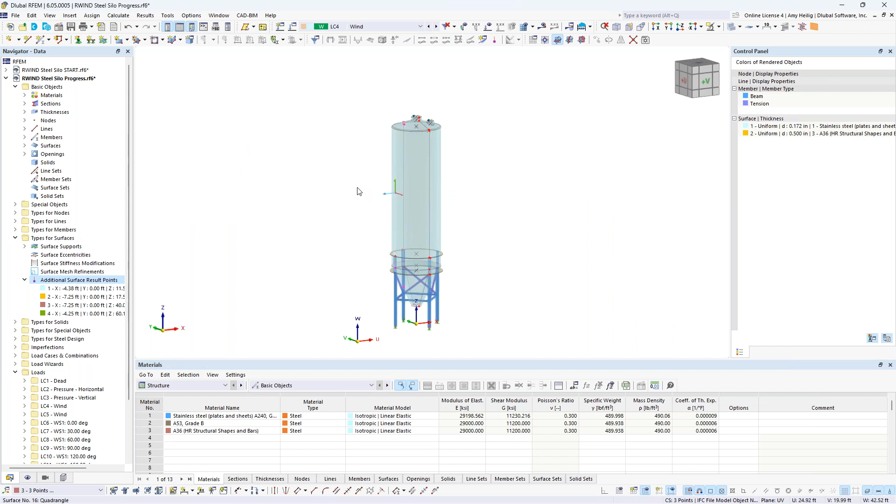So now that we have these points defined, and remember we still have these IFC objects in the background, we would want to open up the RWIND model by going to Calculate, open RWIND here, but I'm going to open up an already saved model. We'll go ahead and launch this because I've already carried out this calculation, which takes just a couple minutes or so. What we should see is a very similar structure to before, but this time we would hope to see the IFC objects also taken into consideration. Sure enough, once we open up our RWIND, we now see our original silo structure that we're interested in, but we also have these IFC objects, and notice the wind tunnel has been adjusted automatically.

So what we would like to do here is run the calculation, and I've already done so. Under the simulation, I thought it might be interesting just to view how the results slightly differ from our single silo when we have taken into consideration these additional silos out in front. Notice that even for IFC objects, we can view the pressures on these in RWIND, but mainly we're interested in the pressures of our rear silo structure here.

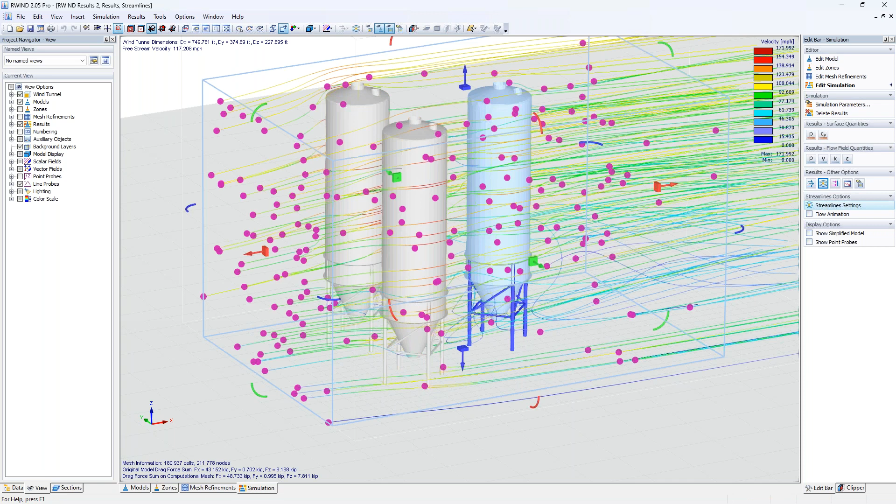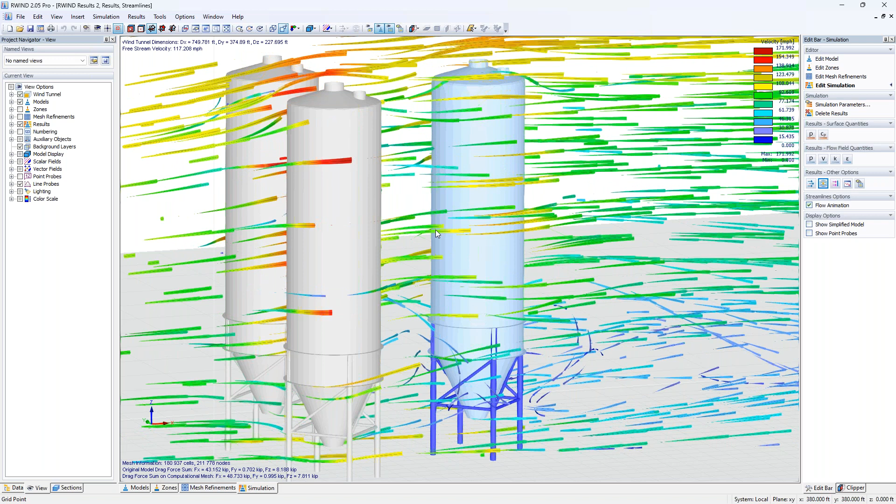If we take a look at the streamlines, we can go ahead and activate these here, and we can make modifications to the streamline settings by graphically narrowing this 3D box inside these 3 silo structures. Maybe we increase the height, click OK, and activate the flow animation. Now we can see how these particles may be deflected by these front 2 silos. That might increase the pressure here for our rear silo, but perhaps the side pressures decrease due to this deflection as well.

Going back to the pressures here, under the data tab, remember how we set those points back in RFEM for the experimental data—these are now inserted here as point probes. You can see those 4 point probes given to me at those particular locations, available here within my navigator. Under my sections tab, I'm going to only activate the RFEM model so we don't need to worry about the view of those additional IFC objects. Currently those point probes, the same points generated in RFEM, are just showing me my pressure from the RWIND analysis.

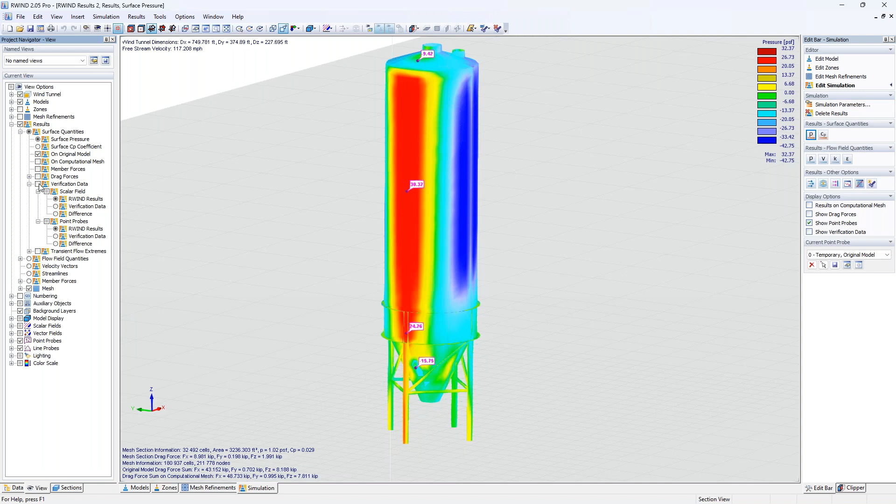But now under the View tab, we can expand the results, and under Surface Quantities, Verification Data, we have the additional options to activate the verification data for the verification points that we set within RFEM. So this should look much more simplified. Notice we have 10 pounds per square foot, 40 pounds per square foot for the body, and that 5 pounds of uplift up at the top.

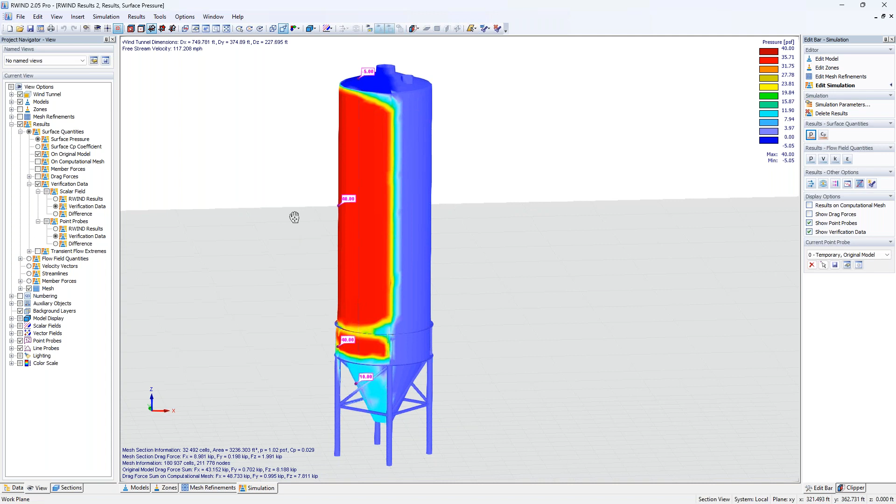Again, in reality we would have many more points here, but the program is going to transition from that experimental data that it's given, and we have zero set for the rest of these points. So going back here to the data tab, what I'd like to point out is that if we double click on these point probes, we have the same options available here to modify these interpolation methods.

This is the same information we saw in RFEM. Notice that my radius is set at 20 feet. Well, I could set this here if I'm interested to something much smaller, like 2 feet. So I click OK and I click Apply. Now you can see what I mean here, that if we set this radius to something much smaller, we're only going to be interpolating the experimental data over this very small area.

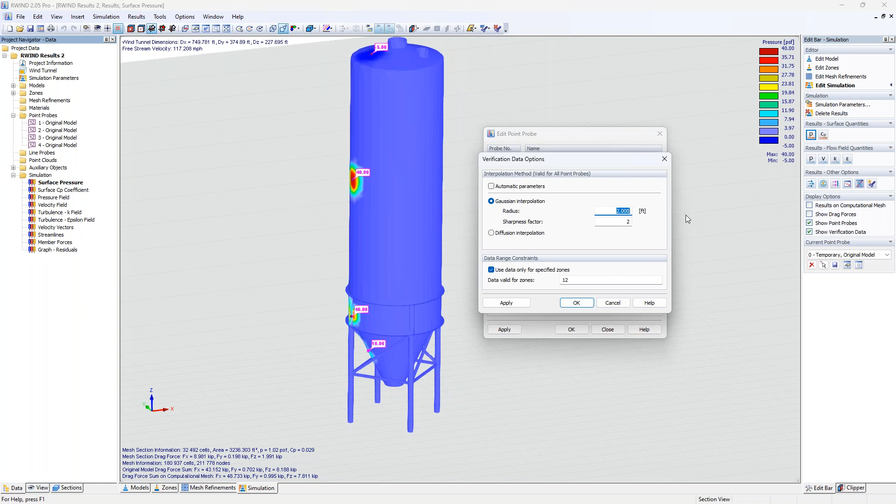That's why I set it to something extremely large, such as 20 feet, to cover this entire surface. If we have multiple points, though, we probably do want to use something much smaller so that the program can use that shrink wrap mesh and interpolate between that experimental data. So going back here to the 20-foot radius, I click OK, and we should see that change.

Back under the View tab, what we can see here is the actual difference now between the RWIND results versus my experimental data with these point probes. This magnitude shown here with these point probes is showing me the pressure difference in those two methods. This can be really interesting for us in comparing to the RWIND results very quickly and easily to something like a true wind tunnel test or analytical calculations.

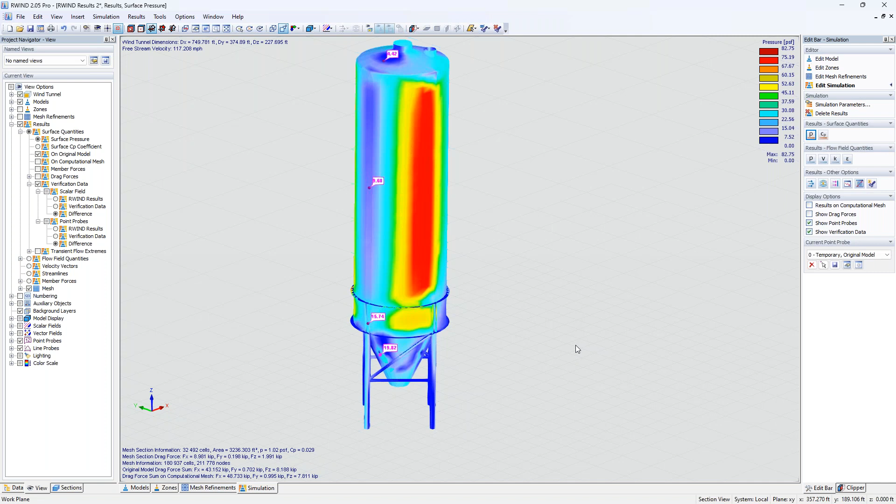Now, exiting back out of RWIND and going back into RFEM, the final thing I wanted to point out is this last feature to use the experimental data for the static analysis. So if I am not interested at all in using my RWIND wind pressures that we've calculated with that CFD analysis, and rather I want to use the experimental data for my static analysis, we could do so with this checkbox here. We still have to carry out the RWIND analysis.

The reason why is because we use that shrink wrap mesh to interpolate between all these experimental data points, just as I showed you within RWIND. So again, the calculation is still needed, but the results of RWIND are no longer important because we're purely going to refer to this experimental data here within the RFEM calculation. So just something I wanted to point out further.